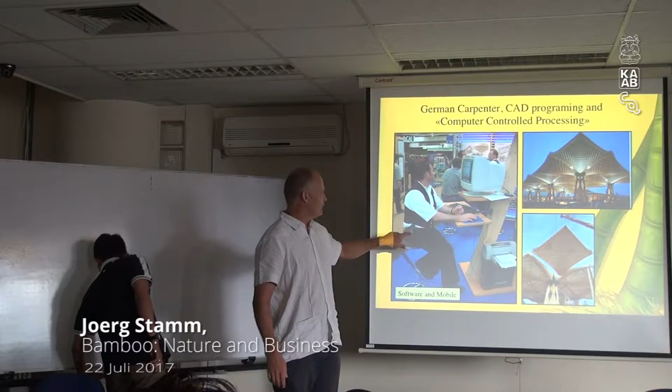So this is the typical job description of a German carpenter now: cell phone and computer. Before it was hard physical work, but there isn't really hard work anymore. Even nowadays you have women carpenters, because nowadays it's all about geometrical understanding, knowing the traditional joinery, and then you put everything into special software.

This is 20 by 20 meters, so imagine this like a 120 by 160 meter big roof in wood, laminated wood. ITB is very famous because you have one of the very first laminated wooden structures in world history. So I think it's very interesting for you to look into wood and also into laminated wood.

I brought you here one of the very first, some of you in Java also have this, from Indo bamboo. This is artificial wood. If you produce these kinds of laminated woods made from bamboo, you can also make beautiful big architecture with this type of material.

So as we have so much computers nowadays, and even automatic prefabrication, the computer chip, the hard disk, the CD, you take it out and put it in a big machine, and you put the trees in on one side, and on the other side all the little wood pieces come out with perfect cuts and drilling, perfectly prefabricated. Making one house is a one day job: one day designing, one day prefabrication, and maybe 2 or 3 days constructing. So there is no more work for carpenters like me, and I have to go to Indonesia to look for a job.

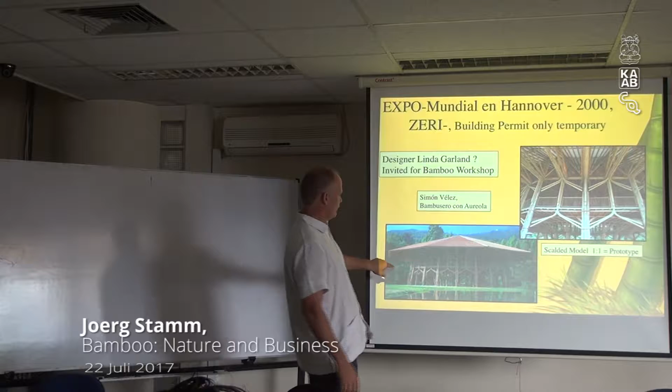For example, this building was tested, engineer tested in a prototype. They ran cables from here to here and from here to here, put a lot of load on it, and with the total station they checked all the deformations. Later they put the AutoCAD design into the computer to calculate with SAP 2000 and measure all the deformations, to get conclusions about the engineering capacity of bamboo.

We know bamboo has very big tensile strength, similar to steel, but the problem is in the joinery. So later we can talk a little bit about this - you were very honest, showing also the bad parts of your construction, because only if we put our fingers in the wounds can we really learn.

So making things, building, is a very dangerous job, because you are going into new terrain and you are making errors, or the technicians are making errors, and you are responsible - you as an architect are responsible. So you have to learn first from the masters and then do your own job, but also be able to check critically what you have done wrong.

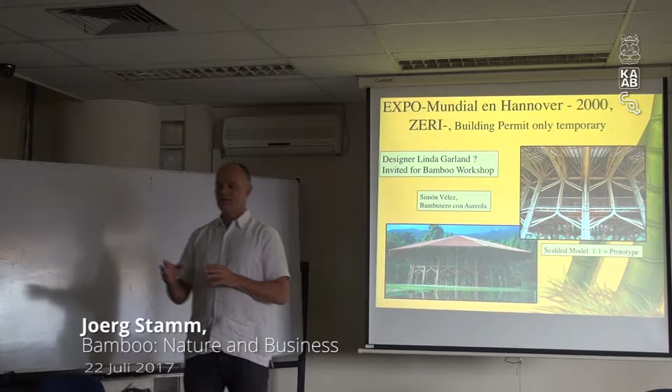But at the very end, you must bring in engineers to do the testing and verify if your SAP 2000 calculations are correct. The problem is not the bamboo, the problem is the joinery.

Linda Garland, I think, is also very important. I met Andri at Linda Garland's, but I think you gave the introduction already. So in Bali you now have these types of buildings. Actually, I was in 2005 giving a workshop at Linda Garland's place. I think you were there, and also John Hardy was there, and he got very fascinated about bamboo. He had done some traditional bamboo housing before, but now he started to do these crazy things.

And I think nowadays the world is looking to Indonesia and saying, wow, Indonesia is making wonderful bamboo constructions. And if I see your house, yeah, it's true, it's beautiful. You have a big potential. There is a big potential - only maybe 1% of the market so far.

But there is a potential for guys like Andri to go into the world, and for you too, but you have a fixed job. Still, there is potential for all of you if you become a little bit practiced and also visionary - there will be jobs. Hotels, social work is always good to start with, but you can't survive too long on social work, unless you become a UN consultant or something. That's good, so let's go on.

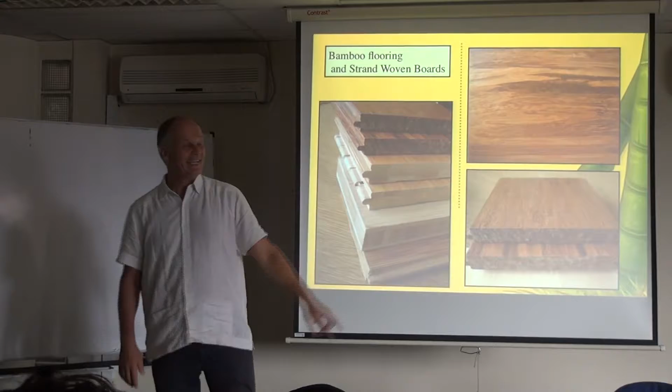So what we are doing is this type of bamboo flooring—we cut, split, and make bamboo flooring. Another type is what you have in hand: you crush the bamboo and glue it together so it really looks like wood. There's not much difference between this and the traditional look of wood. The specific density is more or less 1 ton per cubic meter, between 0.9 and 1.1, depending on the machinery. So the trick is to make splits, and then each kampong can have a collection center, where it is prefabricated into splits.

And then you send it to the factory, like Indo Bamboo or this other factory, Bambu Logi. So you can make blocks.

And these blocks, every carpenter, every furniture maker can use to make furniture. Before, Java was very famous for the teak industry, making thousands of teak chairs for the whole world. The logistics, the factory, the machinery is all there, but there is no more raw material. I think this, together with the 1,000 village program that Arif is promoting now, is the future of Java, and maybe Sumatra and Bali.

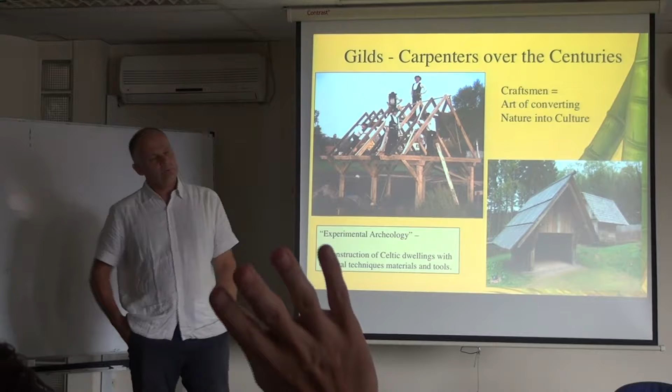So, a different topic. Yeah.

For the bamboo boards, I have a question. I already tried to work with bamboo boards made in Indonesia, but the problem was that it was just too expensive. I found a few factories, and the price for the material, the laminated board, was actually not much cheaper than teak wood. While in Vietnam or China, I get the boards cheaper than multiplex.

Not in China. Maybe in Vietnam you still get the same technology applied now, but the quality is so shitty, really as bad as multiplex. So the price relationship is very much tied to quality.

China made a big error for many years - they were harvesting 3-year-old bamboo. Now they have recognized that for panels you must have 5-year-old bamboo. The specific density of the bamboo must be around 0.6 to process it.

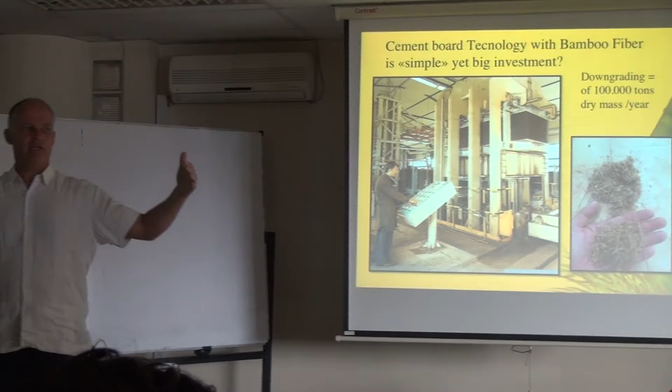And in China you have big industry - maybe 80% of an entire village is working for bamboo. Some are using bamboo laminate, some are using the leaves, some are using the fibers, some are using the sawdust, so 100% of the bamboo is going into production.

If you start a bamboo business in Indonesia, even though the bamboo is cheaper here and labor is cheaper than in China, you still have the problem that you have only one production line and one product. And 70% of the bamboo becomes sawdust - only 30% becomes final product, 70% becomes bamboo sawdust. And that's where you lose money. It's the most expensive sawdust in the world.

So I had a factory, I was doing bamboo laminates, and I produced at $2,000 per cubic meter. And China sells for $1,000 per cubic meter, and maybe Vietnam even for less. So laminate bamboo is very expensive - more expensive than teak.

You are right, and this is the problem. But the future - if you see here, this is sawdust - if you combine this machinery with the other one, go one back, then you are much better, because then you have a sequenced production line, you have different products, and it becomes organized and cheaper.

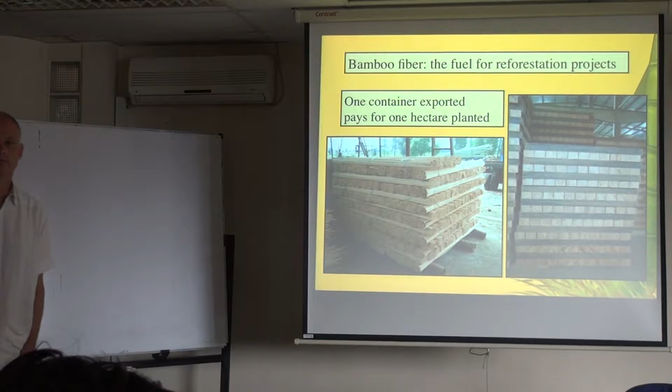But then in Indonesia, the Indonesian-produced bamboo boards are very different in terms of price. So why should I take bamboo then? Or how do I produce bamboo?

I mean, I've talked to the factories, I tried to understand their way of production, and the thing is, of course, the labor is cheaper here than in China, but it's also way less efficient than in China. So you have to work on efficiency, and you have to work on big scale production, and it will become similar to China here.

It's just a process of 10 years. You just started here - there are only 2 factories who make bamboo laminates here, and they are obviously much more expensive than big scale operations in China. China produces 30,000 square meters a month per factory, and they have hundreds of factories.

So on the big scale, the small factories in China went broke. They cannot compete with the big factories anymore. So there is price fighting worldwide, and I think your error is that you are targeting cheap. You should target the high-end market. You cannot compete plywood with beautiful, normal, ugly standard plywood at maybe $500 per cubic meter against high density, high value, beautiful, clean surfaces like produced by bamboo laminate. So you're using a very expensive wood for cheap applications. You have to think, if you do bamboo boards, you have to think in high-end products.

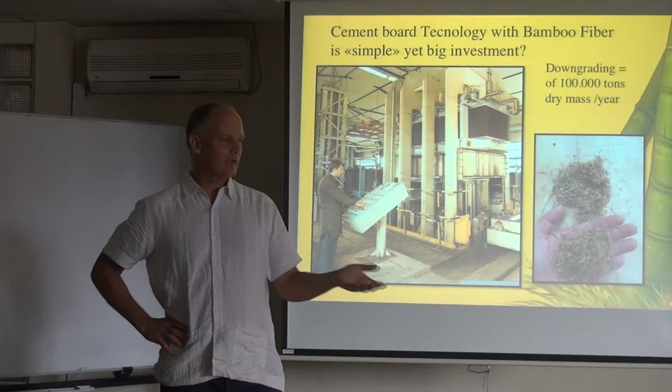The same like China. After Mao Zedong, China was a disaster. Then Deng Xiaoping organized China. He allowed a little bit of private industry to flourish, and nowadays China is planting 50,000 hectares of bamboo every year, because bamboo is recovering far faster than the hardwood. So the chicken and the egg is the same problem as getting bamboo industry into process.

But you are more architects, you are not into industry at this point. I just give you the vision. So there is one thing, can you go on?

In architecture, if you build traditional houses, you also have high added value, because the perfect bamboo pole gives very high added value in very short time. With 100 poles you can make a 100 square meter house very fast. But the 100 poles must be perfectly treated, perfectly straight. So maybe for 100 perfect poles you have 900 not-perfect poles. So 900 poles go into industry and 100 poles go into architecture. So I see that architecture is the flagship for bamboo development, but the real money is not in architecture, it's in the big scale operation of industrial uses.

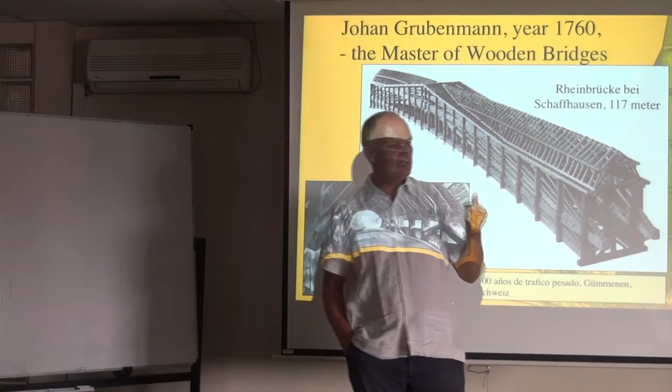So how can I make the structural capacity of bamboo visible? I look into my own history. This was a 117-meter bridge, built in 1760. This bridge was the biggest wood bridge ever built, before engineering was invented.

Engineering came up with Gustave Eiffel when he built the Eiffel Tower. He used French carpenters to build the shape, to give him an idea about how to structure the Eiffel Tower. So before Gustave Eiffel, there were carpenters who were able to build 117-meter bridges over the Rhine. And the guy who did this, Johan Grubenmann, he did not know how to read, he did not know how to write, but he knew mathematics and he knew he had a good crew of tukangs.

And the span, like here, two big carts of horses, carreta, can go through here, very heavy, 50 tons each. So the old school is very important. Go.

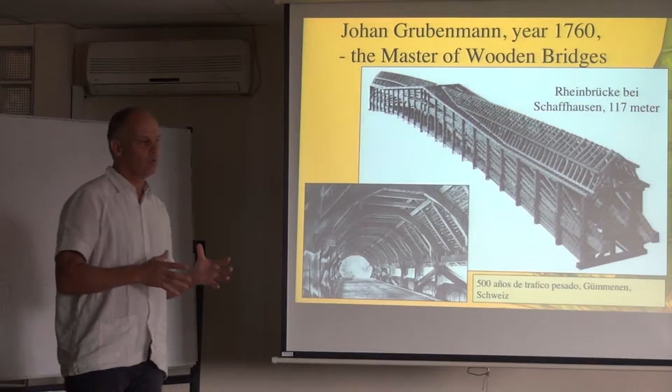So what I do is transfer old wooden bridges into bamboo bridges. My specialty is not inventing bamboo or designing with bamboo. My specialty is the joinery. All these little joints are very well thought through, because in Germany the carpenter is not a designer. The carpenter is only responsible for the joinery, for the traditional execution of the joinery. That's our strength. The engineer designs, the architect designs, the engineer does the calculation, and they give us the responsibility for the perfect execution. This is something that has to be developed in Indonesia.

You have to work together with the technical schools. So university is one thing, engineering is another thing, and you have to have the tukangs trained. Otherwise you will have the same problems that Andrea was experiencing, like this hook joint. It's bullshit.

You can use it for furniture, but you cannot use it for structures. But you have to have the experience. So now he has the experience, and later he will do better. So go on, we did this training.

We did a 40-meter bridge. This was the bridge that was the inspiration for you. This is the 40-meter bridge in the University of Pereira.

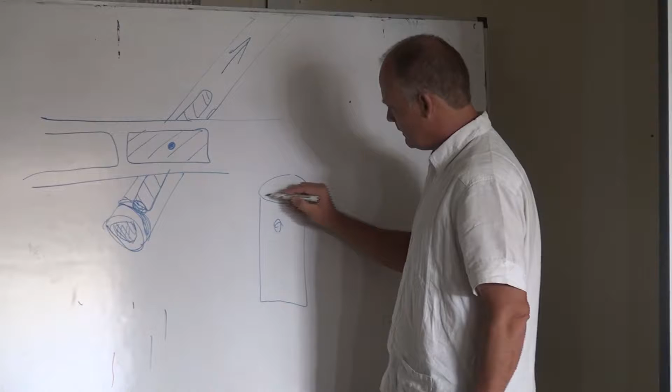If you have a bamboo, you put a screw here, and you do not have a node - let's say the node is here, and the force is going this way - the problem is that the bolt is acting on this part. So it's probably taking this out. So if there is cement in here, it is only working on this piece of wood.

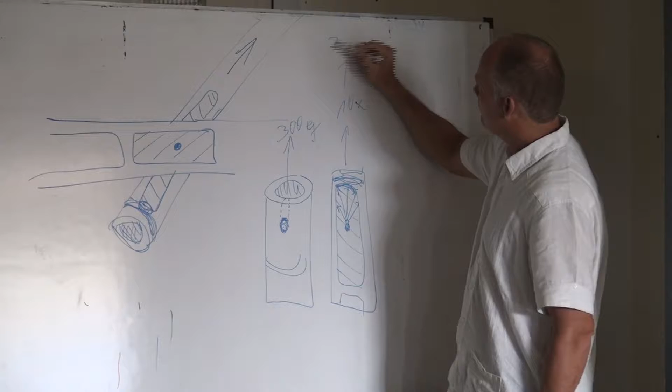But if you have this situation, and you have cement in here, then the cement is covering all this area here, including the node here, and it's 10 times the capacity. So here we have more or less 300 kilos, and here we have 3,000 kilos of tensile capacity.

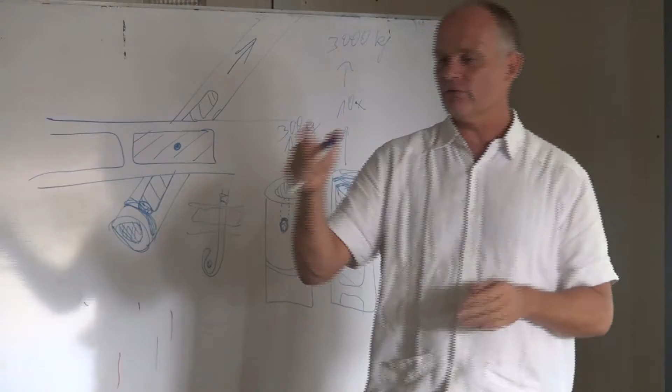This is something that has to be developed. It's part of the engineering process you have to do. And if you put a hook like you were doing here - here is your bamboo, and here is the other bamboo, you have a hook - your hook is actually doing this. The hook doesn't have the resistance, so this is a furniture joint. They do it a lot in Colombia, but it's wrong.

A lot of things done in Colombia are good for one-story buildings. They are beautiful, but structurally not sound. So I think Andre is a much better consultant because he studied structures. He knows exactly what I'm talking about, and you have to go much more in detail into these little joinery things. It comes down to the tukang.

I'm a tukang, I'm a carpenter. My responsibility in a bridge is to make this thing work. The engineer tells me this element has to resist 10 tons. So I know how to distribute the 10 tons in the different nodes.

Maybe I have to put a second bamboo here. I can put a second one here, and a second bamboo here. So I have already something here, and then I can have another bamboo going in the cross direction, so I do another joint here. There are many possibilities to upgrade joinery to the resistance I need.

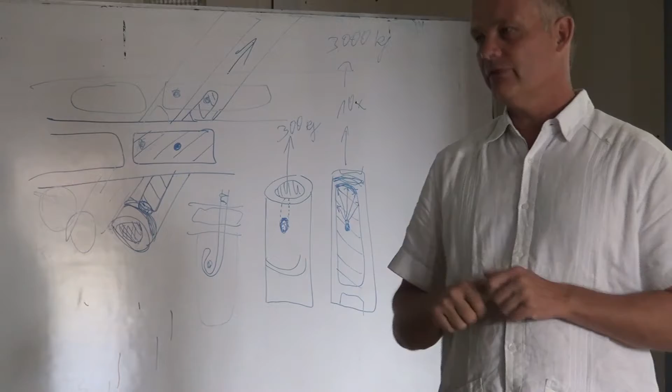The node must be here, for example. And you can still have going further down, and also on the top. So I also have 10 or 20 centimeters possibility of putting it a little bit longer. But always after 30, 40, 50 centimeters, there's always a node. So your system has to be thought out already to have this kind of tolerance. You always have to have a node, always a node after the...

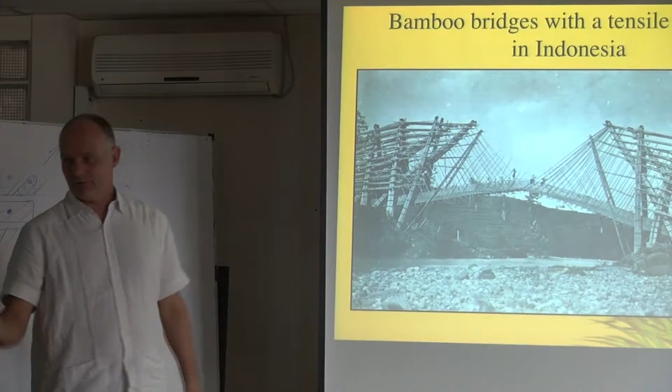I think in your presentation we could clearly see some bolts were just cutting through, because of this little problem. Okay, next. I was very happy to see the Indonesian achievement, like 1910. This photo was taken. Java had a very outstanding bamboo construction history. This is great. This is a tensile concept.

This is a cable-stayed bridge. It's top engineering in the 21st century. How can we get this back into tensile structures? It doesn't have to be exactly the same, but the thinking that was done in this bridge is extraordinary, and it's your cultural heritage. So pick up at that point. Go.

This is another bridge. It was inspired by a footbridge in Germany, Professor Zengler, who was the most famous German wooden bridge builder. He made this triangular concept, to put the trusses not squared, but together in the middle. So he created a triangular cross-section of the bridge. Very clever. This guy made recently an 80-meter bridge in wood. And I admire this guy, and I learned from him to think out of the box.

So here we have tensile elements. I use the petung for the tensile elements and the hitam for the cross bracing, for the cross section. So the outside is compression, the inside is tension. And here you can see the joinery. The petung has very short nodes on the bottom, so you can always play with the petung to get the right distance. And on the top, you just leave it a little bit longer.

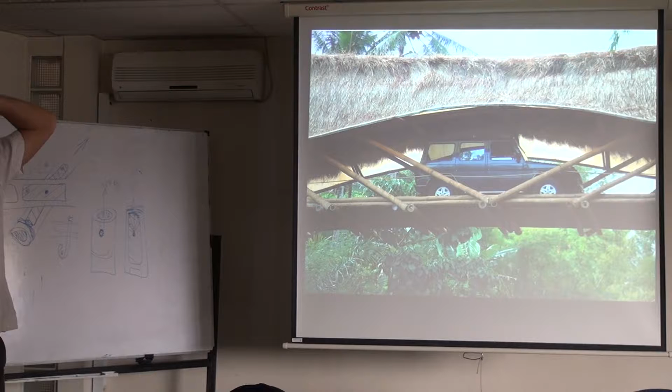That's easily 1,000 divided by... that's easily 20 tons of load on the bridge. This is the problem with the bridges. It's not possible to make a little sign, maximum 12 people. In the moment when it starts raining, nobody sees the sign. They just all walk on the bridge and they go for a bath.

This is a very interesting flooring concept. You were saying that bamboo laminate is very expensive. I had the same problem. Part of it is the glue. The glue is a very high quality glue, so it's very expensive. So I use just the bamboo split vertically and put a pin through it. I call it pin boo. And this flooring is strong enough to distribute the load of the wheels of the car. No glue.

Okay, so this is just design. Structurally there is not much going on here. The bridge basically is the arch, a little bit of distribution, and maybe a little bit of counterweight because there is no cable. If there would be a cable, then you can say it's a cable-stayed bridge. But here we have just a little bit of cement, which is the counterweight to maintain this in the middle.

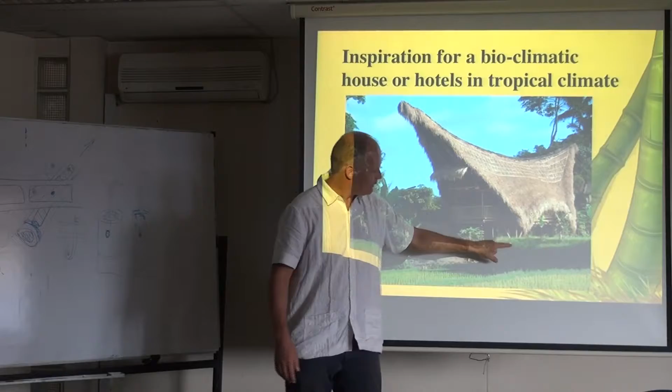This was the first bridge. Later they did a second one. It was not the original one anymore. And then John Hardy donated a house, and this house is standing on 4 points. The entire house is a little bit like Toraja, but the entire house has the idea of leaving the air out. And it's like a bridge, it's standing only on 4 points.

So this is for the architects, just to inspire you that bridge is not everything, but you can also jump over from one theme to another and use structural concepts. Go on. Like you see here, I use the stair. The stair is coming all the way down to the foundation because the stair... go back.

The stair starts somewhere here and goes to this part of the foundation. So the very big cantilever of this roof is tensioned by the stair. It's a little bit like a musical instrument. Now there is a certain tension, inside tension on the bamboo, also with the curve and everything.

Everybody loved this, but the Balinese, they hate it. Balinese need squared houses. Maybe in Toraja you can make such a house, but you cannot make such a house for Balinese—it is against their world perception. It's just not possible. I don't know if they still use it or if it's a museum now, but they didn't like the house.

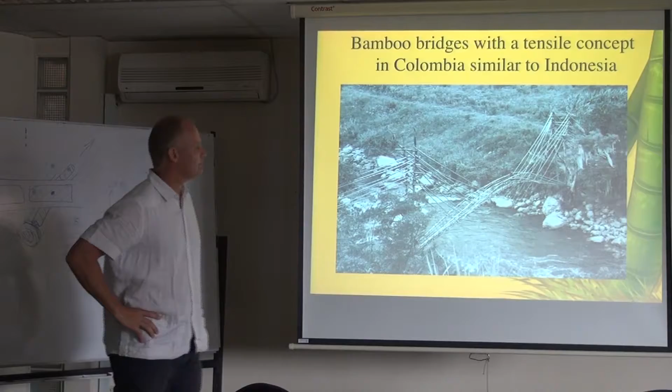So I took that bridge and converted this into a modern design. This bridge has tensile elements and it has the bow—so here is the bow, and here are the tensile elements. This is a 24-meter bamboo, but it has 8 meters here, 8 meters here, then 4, 8, 8, 4. So I'm overlapping the bamboo to make tensile elements, and the joinery is done like this, with a rebar inside. So I use this concept.

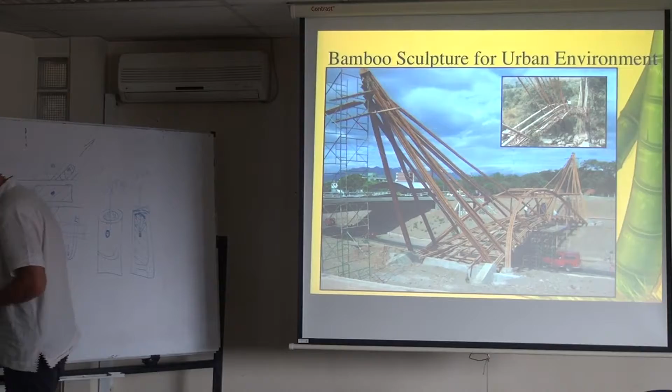Here is the rebar and the cement. This is the way I can even put a second node. If I need a bigger rebar, I can put a second node here and a second node here, and also— you understand the concept, no?

And then the other bamboo is basically going from here to here, and has the same situation here. Additionally, you can have all kinds of screws—just giving you some ideas of how to build this. You need a counterweight, right, on this—yeah, here I have a big metal plate, and you can see it in the next photo.

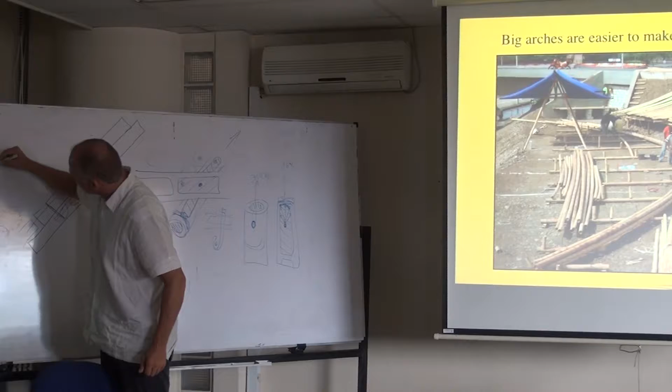So I don't like the wrap technique that is used in Green School. In Green School they have a bamboo like this, and they cut here to bend it. But what's remaining is basically only this part of the bamboo is structural. This is remaining from the bamboo, so this is not a structural concept—this is working with splits, bending splits. The structural integrity of a bamboo tube is cut here, cut here, cut here, so it becomes a combination of short sticks. It is not structurally sound.

So what you have to do is select the curved bamboo. When you buy it from the farmers in the field, the bamboo is like this, so you have to pay the farmer extra money to bring the very crooked ones for shipment. Normally they cut the crooked ones into short pieces because there are many crooked bamboos, but they cut them short. You have to pay extra money to get the very curved ones, and then you can make very good bridges. They are there, but the farmers cut them into pieces.

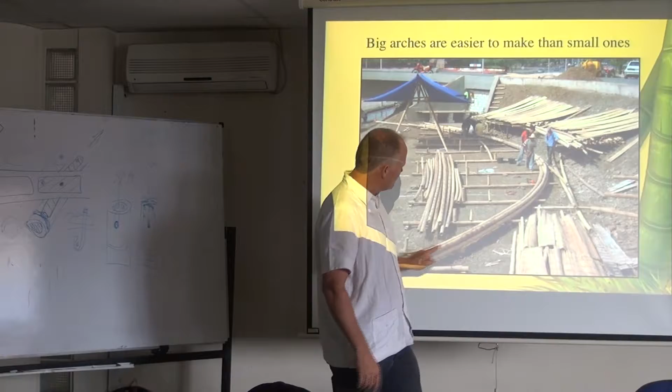So I select—look here, they're all very long, a little bit curved because they are for the arch that goes here. You see, there is a system, a coordinate system. I have line X here, line Y here, and each steel pin is from the coordinate system in my AutoCAD plan—I transfer it to the soil. So I can make this arch, I can make this arch, I can make this arch. It's exact, with 1 centimeter tolerance—that's the way to work.

And it's a system—it's what carpenters do. Carpenters put something on the ground, they take the plan, they put it on the ground, and they work on the ground first, and later it is erected again. This is the trick to do big structures—at least it's my way.

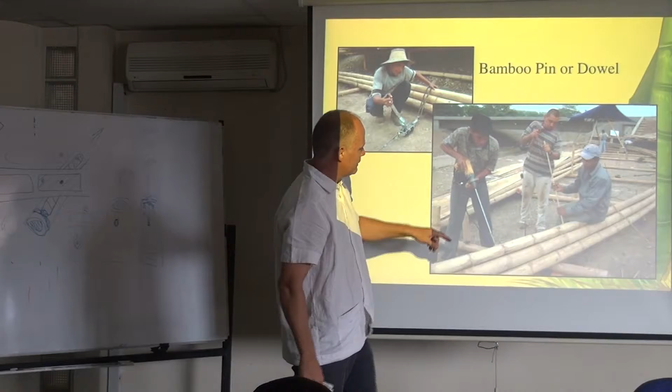Sometimes we can press a little bit, and then I put bamboo pins every 50 centimeters to combine them. Let's say you have 3 bamboos, and then I put bamboo pins here, here, here, and here. Sometimes I also use steel rods, for example here's a steel rod, when the bamboo is not voluntarily coming down, if it's a little bit up and doesn't really want to come down.

What's the size of the bamboo pins? 12 milli. I make them myself, dowels. I have a dowel machine, and all the bamboo that is not usable for long elements, I cut in 1 meter 20 and make dowels.

So you see the whole bridge is pre-assembled on the ground. That is very typical German, French, or Swedish way of building houses. We do everything on the ground, and then with scaffolding or maybe a little car crane, we just bring it up. This you can only do with bamboo, you cannot do this with wood structures. Wood is too heavy, but bamboo is light, it's a lightweight construction. So the concept is build on the ground and then use a crane or labor force like you did with your 100 Filipinos, just put it there.

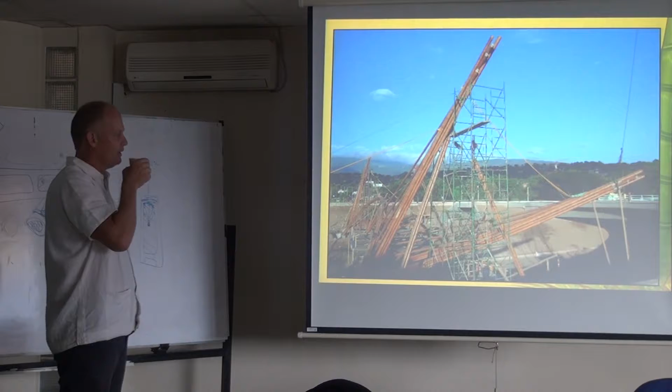You see here, I limited the width. The width of the road is only 3 meters, because if I would make 6 meters, like now in Medan, we are doing a 6 meter wide road, but then I have the danger of having 1,000 people on the bridge. If I limit the road, I have only 500 people. But the architect in Medan is a little bit stubborn, I told him to, but he wants to have a disaster, so I don't know.

I'm curious, how do you erect the curve when the road is still normally used by cars? It's already selected. When the bamboo comes in, I have a truck with 200 bamboo, so 20 are very curved, 20 are a little bit curved, and 30 are straight.

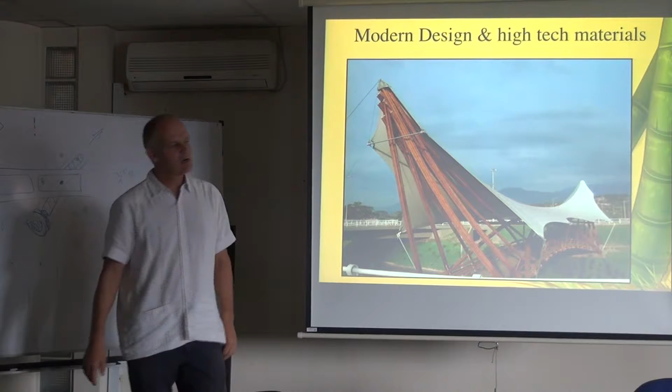Do you put them all on the road, do you stop the road operationally? You see here the scaffolding, and the road is free. You see there is a bridge, like we call it a false bridge, and there is scaffolding under the bridge, but the road actually is going through here.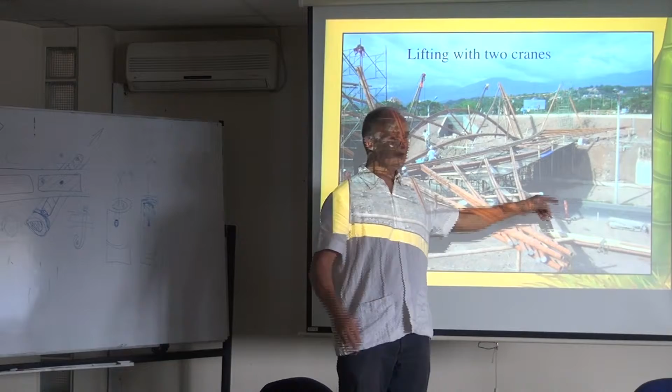But in Colombia we have a little bit of a problem which you don't have here in Indonesia. Colombians like to drink whiskey, and especially in this city we had an accident because some drunken drivers jammed into the scaffolding and damaged it. The car, I don't care, but even though he took out the whole line of scaffolding, it was still strong. So the scaffolding was not on the street, but he kind of hit it anyway.

I wonder about the durability of this bamboo, because it is not really covered. Well, it's now 10 years, so you see some cracks here. The cracks are basically from non-mature bamboo, especially petung. If petung is only 2 or 3 years old, you have lots of cracks, if it's 5 or 6 years, you have little cracking, same with guadua. But the problem is the delivery is always late, the bamboo comes always green, and you don't really have 100% selection, so sometimes a little bit of unmature bamboo goes into the structure.

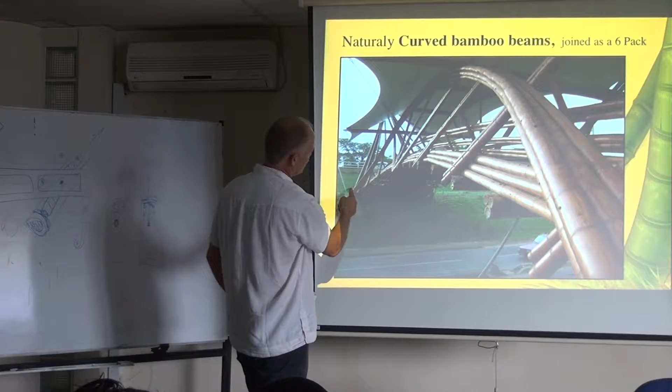But you have big packages here. We have a 3 meter span from here to here with the roof. So it's more or less 3 meters here, and the bridge here is wider, but you can also see that the roof is wider, so we have sun coming in, which is actually causing the cracking.

But then I have a very good coating, like Livos deck oil. It's very good coating, and we also used it in Koh Kood in Thailand. Is it available here in Indonesia? There's a distributor in Bangkok who sends also to Jakarta. It's called Livos Alice deck oil, it's very good. But I think you also have local products here that are good enough. Anyway, it's just a question of coating.

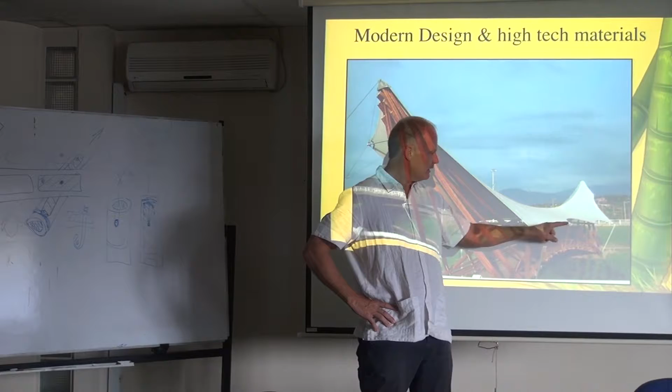So here you see the sun is now coming from the side, and I put these 2 additional points. Normally it would go straight, but then I would not have enough shadow, so I introduced 2 extra points. This roof shape is actually inspired by Indonesia, because before coming to Indonesia, all my bridges were straight and square. I learned in Bali, like also with the Batak houses and the Minang houses, they have this shape so the hot air inside is always going out. I love this inspiration from this style of roof.

Here in Vero Beach, Florida, we did this to let the air out, so this is a little bit more like a Javanese Joglo style. But it was the first building in the United States with full certificates, like engineers signing off for a bamboo building in the United States. That was a big achievement in 2004.

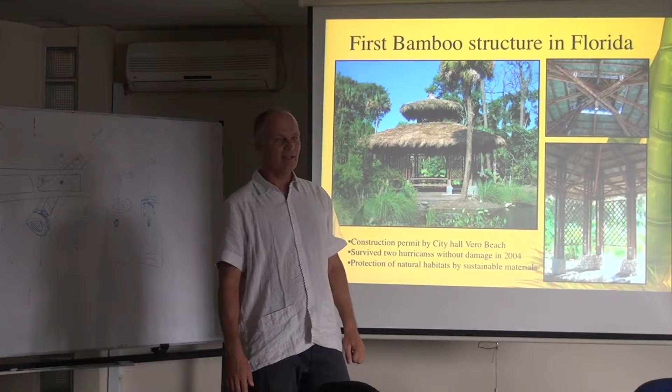You mean Indian, American Indian or Indian? American Indians.

This is another development. Actually, bamboo is very straight, sometimes a little bit crooked, but not really curved. So at John Hardy, we played around, because he's a jewelry designer, so he wants to make everything curved. It's not possible - or is it not possible, or do I have a limitation in my brain? One day I was seeing a whole pile of bamboo, because we always work with the bottom part, we never work with the top part. But the providers were also sending the top part, the tip, or the ujung, and it was always piled up there. So how can I use this?

Then I came across a book about Japanese architecture and Japanese gardening, and they have something called tamabuchi, which is like a broom, like a lidi. So we cut all the bamboo into 1 centimeter, pencil-sized sticks, and join them together with tali.

And then you can actually bend it. You can see here, it's all bent, like a big rope. Or here.

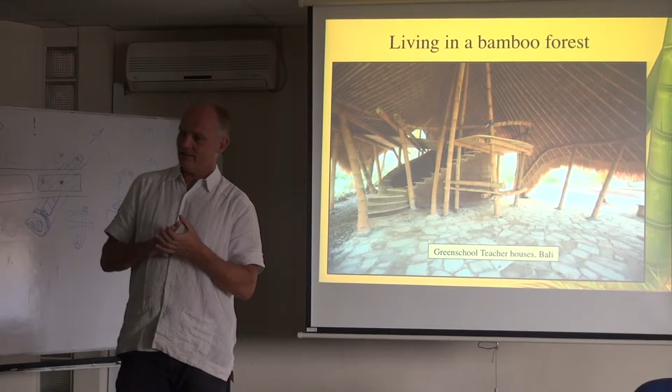So using all this bamboo lidi, we discovered a completely new system of construction. Actually, it's not very good in flexion, it's only good in tension. But if you put some bamboo split inside the lidi, then it becomes strong, or you can put a smaller bamboo inside and bend it, and it's still strong enough.

Can you please tell us how to bind those small lidi bamboo? Go back to the 2 or 3 photos back. Here, yes. So I take a Spanish windlass. I have maybe 100 splits, like very 1 centimeter by 1 centimeter. Then I take a rope and this.

Rattan or what? No, this is rope, they use bamboo tali. You can cut and make bamboo tali out of it, that's why it's called bamboo tali - you can make a rope out of bamboo. So this rope you can buy. Then first I press the lidi really strong with the rope, I twist it, I press it. Then I put the tali around with a little bit of lem, a little bit of glue.

You press it around and then you release it, like a Spanish windlass, and then you have the system.

Do you construct it on site or on the ground, vertically or on the ground? We prefabricate in the factory and then 20 people walk it to the site. How do you form it? You can form it in place. First you make one straight lidi and then you just twist it.

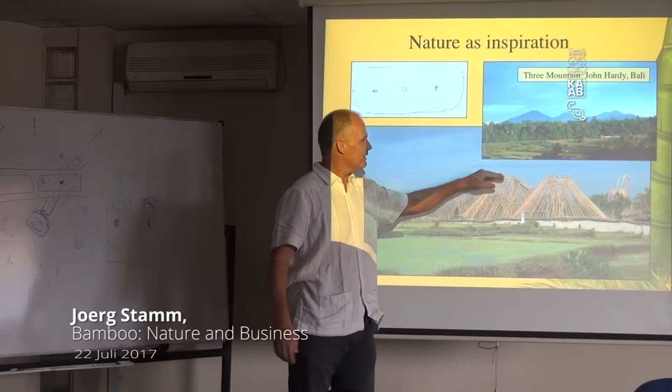So inside, go on, one more - inside you have this tower. So I have a ring formation on top, a strong ring, laminated bamboo ring. And on the bottom I have another ring. And I have these V-shape elements.

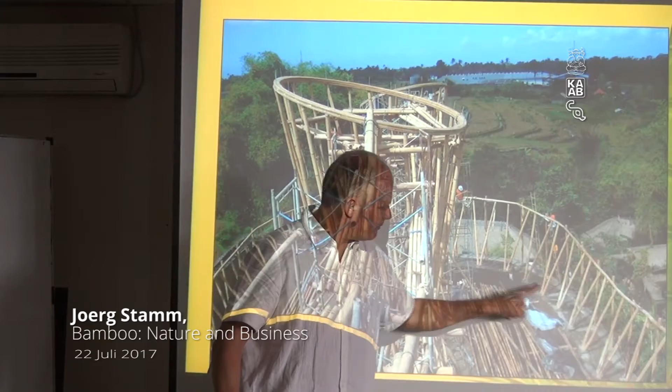Then we put the rafter from the top ring to the bottom ring. And I think now you can explain, because this is the first building that has been recycled.

After 7 years they needed a new roof, but the world economy was not so good, so they decided to sell the whole building. And the whole building was transferred to Turtle Island. And you were the master of reconstruction.

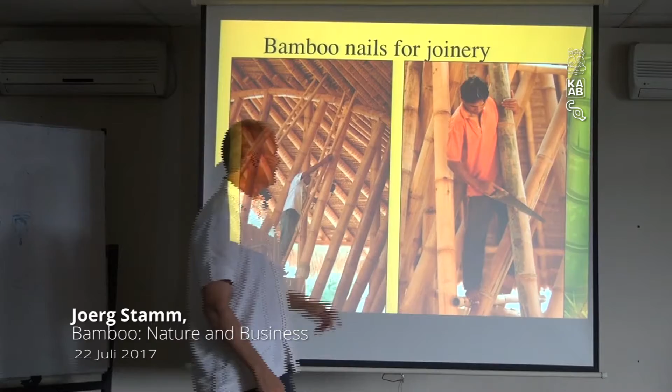But if you go like this, from here to here and from here to here, the cross will prevent you from taking this apart. So the whole tower was calculated for 40 tons of weight, because if the alang-alang gets wet, it will put 40 tons on each tower. Nevertheless, we never had a problem with this system. It's very strong, very interesting, because nobody sees it. If you have steel, everybody says 'engineered structure, very clever,' yeah?

Sometimes if I know where the force is acting and I know there's a lot of force, I still use steel rods in the same system, and cut here, because it cannot come out. But if the force is only around 300 kilos, I can use bamboo, I don't need steel. But if the force is like 2000 kilos, then I have to use steel.

So this is a little bit of the effect, you have compression, tension, tension, and here you have compression. On the top, I have a skylight, but the roof of the skylight, the glass, is like 30 centimeters higher than the roof.

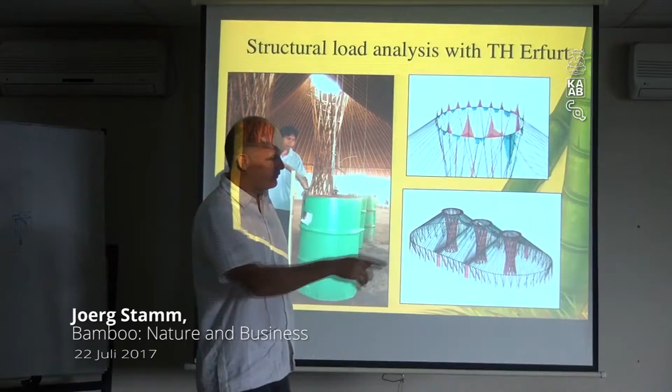So, one more photo. You can see the air is coming in and going out, it's very nice natural air conditioning. This is one of the most amazing discoveries, Green School doesn't need aircon, it's natural aircon.

So tell me the story about Professor Neuhoff, did he come to do the engineering, or you don't know too much about it? One of the professors working together with Andri in Germany came with a student group, wanting to see a bamboo building. We were just doing this, and we needed engineering, because the authorities always want a sign-off from an engineer. But no Indonesian engineer was willing to sign off.

Understandable, because you're responsible, you go to jail. Although you have a very beautiful jail here, I passed by Lapas Sukamiskin, a very big one. I think it's better to stay out.

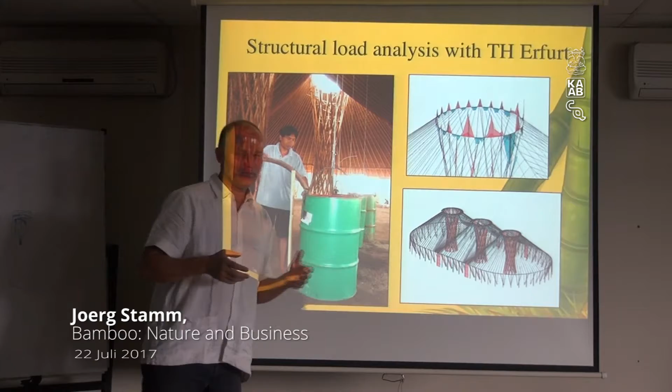Anyway, Professor Neuhoff and the German students took some measurements. This barrel was actually hanging on the roof, on the rafters, with 200 kilos of water in it. In total we had 5 barrels, 1 ton of water, and the roof came down 16 or 17 centimeters.

And at the same time, when the roof comes down, it goes a little bit like this. Yes, so basically the span here expanded like 3 or 4 centimeters. So these measurements were taken, and then they brought this to Germany.

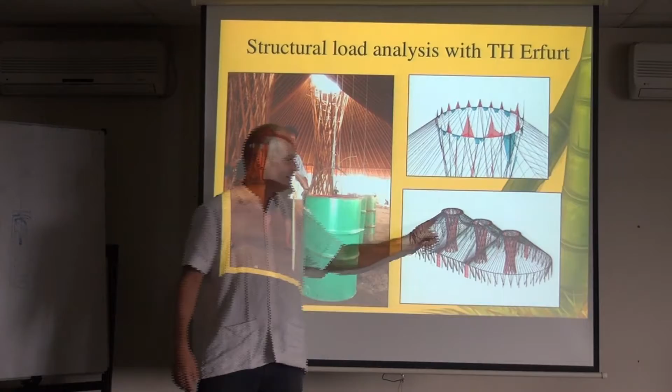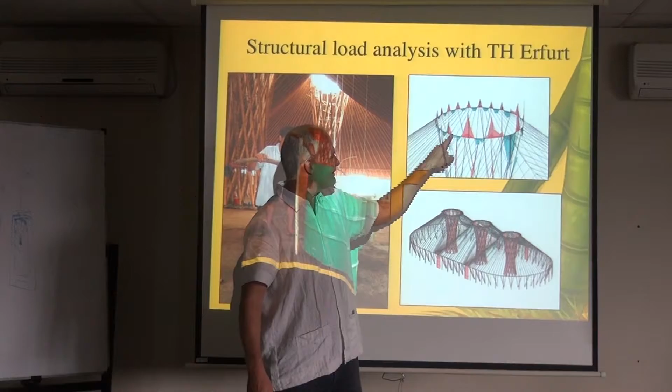When they came to Germany, they noticed their software didn't have enough capacity to calculate all those elements, because there were like 500 elements in this - 500 elements means probably 1,000 joints. So they didn't really have the software to calculate it. It took about a year until they got financed for new software. They bought the most modern software, put this whole building in it, and calculated the stresses at each point.

Wonderful graphic. But for me, the most important thing was Professor Neuhoff called me and said, 'Jörg, I must congratulate you, your gut feeling was just 3% different from the ideal point of building this structure.' For me it was a very honorable comment, because from 20 years of experience working with bamboo and wood, I could mostly predict not only the bamboo but also the strength of the joinery. Because as I told you, we have to work together - architects, the concept, the engineering, the execution have to be perfectly executed.

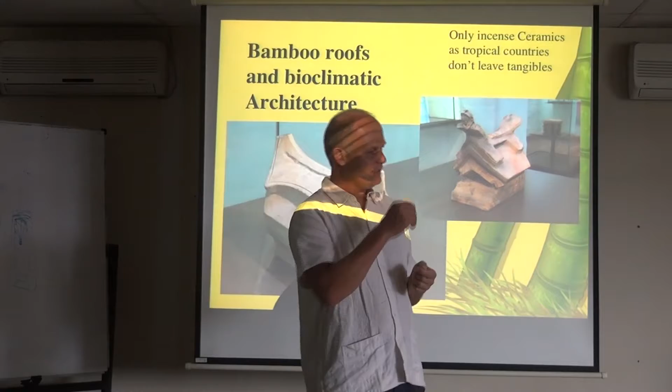So bioclimatic architecture has been done centuries ago. These are ceramic houses, for incense - like smoke, like Menyan, sandalwood. So the ancient Ecuadorian people made these little houses to smoke to the gods and to pray. But look at the shape of the roof - typical tropical architecture.

Nowadays in the tropics everything is squared with a zinc roof on top - this is the architecture of today. And before, this was the architecture. I think this is very similar to Batak or Karo, and also very similar to Toraja. So maybe there is some connection between Indonesia and Ecuador.

So I was building a house there with the same system, prefabricating big A-frames, and we used the bamboo as scaffolding. Later, when you finish the house, you take the horizontal beams out. But the house is standing on four beton pillars.

So my proposal was this should be the architecture for the tourism industry, because this is ethnic identification with cultures that have been in Ecuador 3,000 years ago. They have bioclimatic aspects, cultural aspects, natural materials. For me as a tourist, I would go here - I would not go to a standard square box, 7-story tourist hotel. So my proposal after the earthquake, we just built this. We trained the personnel, we trained the local carpenters, and we also gave them a new idea about their own culture, because it was completely forgotten - nobody knows.

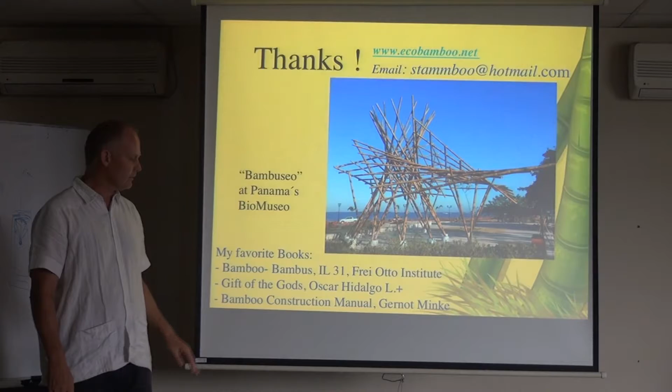Okay, so some books - the most important books, in English at least: 'Bamboo, Gift of the Gods' from Oscar Hidalgo, which looks at thousands of constructions all over the world, and the Bamboo Construction Manual from Gernot Minke. My email, and that's it for now.

So now we can have a little bit of discussion, or rest, maybe some cigarette or coffee.

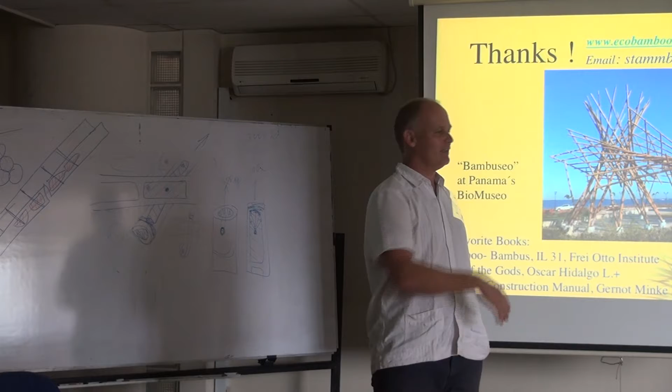They were discussing the price so much, and at the end of the day the provider just cheated and sent a lot of bamboo that was not suitable. So price discussion without actual knowledge about what you are doing is worthless.

The same with the tukangs. If you get a tukang, they all know everything, they're all the best. The Colombian carpenters, the same with the Indonesian carpenters, with the Balinese, they're all the best.

But when it comes to cement mortar injection, they have no idea, they've never done that, and they don't understand where the bukus have to stand. Like in your construction, you have so many errors because they did not look to the bukus. Or they just tell you, we can't, because they have different distances. Then you must change the concept, you must adapt the concept to the situation of your bamboo.

So I think the training is more about linking the engineers with the tukangs. It's not that I have to show them, they are very good. But they need better payment, they need recognition, and they need a little bit of working-together capacity, because for tukangs, sometimes 1 centimeter or 1 millimeter, no problem, no difference. But in engineering, that can make a difference.

Because if you go for the perfect curve, then the structure, the beam, is very strong. But if you go a little bit, like 2 or 3 centimeters off, like in your situation there, the bamboo was just not perfectly curved, then you will have a structural failure right at the point where it goes 2 or 3 centimeters down.

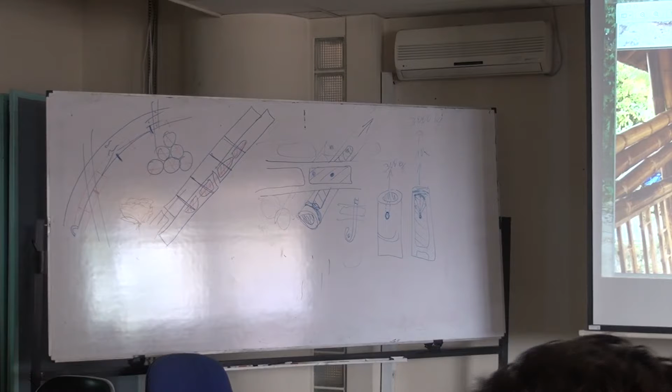Probably we should also go into some mistakes. Again, in Colombia - show me the collapsed second bridge. Yeah, the collapsed bridge - this bridge was supposed to be done by Simon Velez.

So Simon Velez is a very experienced and very high quality architect. He has a good team. But the problem is he was asking for, I think, $300,000, something like that, for the bridge, because he is a private entrepreneur and he has to pay the people. But then a local institution like the Technical Institute of Medellin said, we can do it. We are bamboo technicians, we are the specialists, and we will hire an engineer, and the engineer will do the bamboo engineering of the bridge, and we will do the craftsmanship - we will do it with our institute. So they were getting 16-year-old, 18-year-old young guys that have no experience in life.

And the supervisor was a big, fat, eternal employee - like, he was a carpenter, but he'd been 50 years already in the institution, and you know how institutional mentality is. And they started to build the bridge, and they didn't pay a penny. They were all interns - there was not one experienced carpenter. All interns, because they wanted to show that the institution can do good. And this is the result.

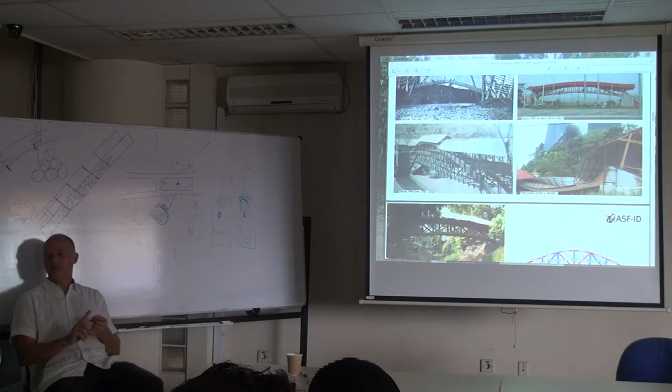And what about regulations and permits in Colombian cities like Medellin? Yeah, if you have a computer program that says it's okay, then you can build, because then the insurance paid for this - every step was formally done well. But they just didn't count on the craftsmanship, they didn't count on the quality bamboo. They did everything wrong, but formally, they fulfilled all the requirements.

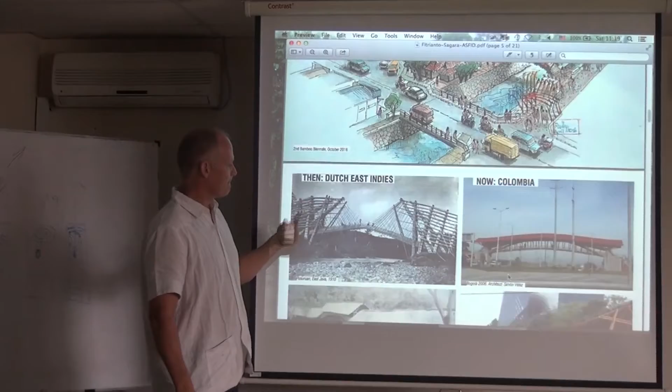So I can only warn you - you really need to start slowly and get better and better. Like what you had here with yours - go on, 2 or 3. Before, after? No, I don't remember. But no, in the building process - here, stop. This is not working.

So let's say you even do the welding - maybe you do welding of this. But what will happen is that this hook, first it will get like this, second this will go like this. So you create stress here, and this creates a crack. But if you put cement in here, at least this thing will not go down - it will stay straight because it's on cement. So this is the first error.

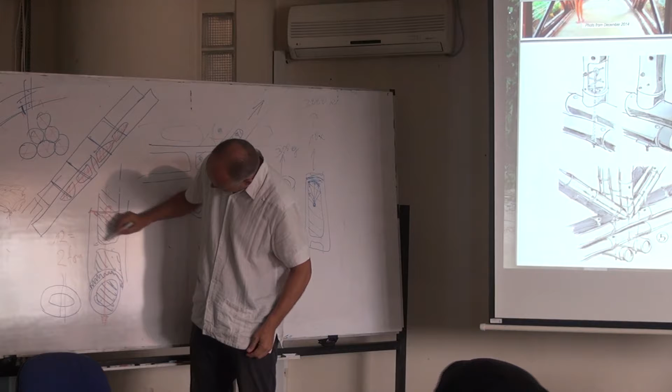And you see here you have a force, and here you have a force. So we did the testing, and after 2 or 3 tons going in this direction, the bamboo will crack, because the force here and the force here, they are actually separating. But 2 or 3 tons is already 10 times more than only having a screw. 10 times more is a lot.

So sooner or later you must do some joinery testing, and it's all described in the book of The Gift of the Gods. Jenny Garzón did the testing.

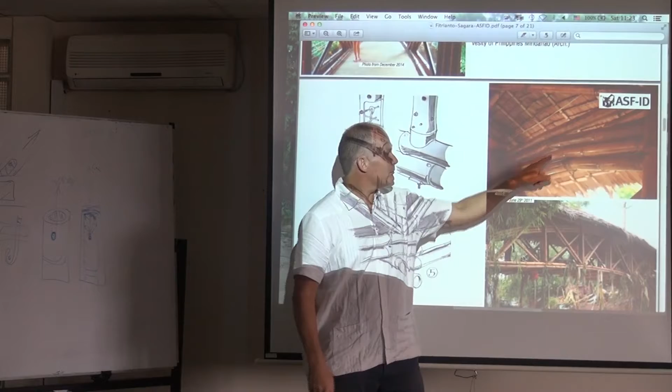So this node is very important, but in some of your photos, go up. No, other way around. Look here, for example, here you have this type of joint, but it's very far away from it, it's just in the middle. That's why it's going up, and then it's pressing on this, and it's creating this. So it's the position of the joint that is the problem.

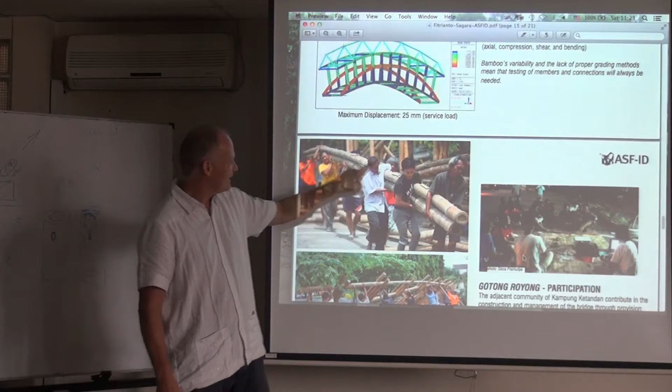So all the engineering is very nice. Stop. Do you see this straight line? It's curved here, then it's almost straight, and then it's going over. You remember the final bridge? The same straight line here is finally in your arch also.

So selecting the right bamboo, the right curve, is only possible if you have a lot of bamboo for selection. So when you start a bridge project, you have to bring 2 times more bamboo than necessary. This allows you to look for the nice curves. But this has to be reflected also in the budget.

But you're doing community budget, so you have a very strict cost. You don't even apply a fee to yourself. That's why you come up with these very, very cheap prices. In reality, the bridge we are building now in Medan is a $100,000 bridge. That's about 1 billion rupiah. So the price actually is very comparative to a steel bridge, not much cheaper.

30% of the cost goes into the concrete foundation, 30% is bamboo, and 30% is the roofing. If you have a bamboo bridge without a roof, you won't have a bridge after 2 or 3 years. So the roof is part of the bamboo cost, and you can say the concrete is also part of the bamboo cost. So basically $30,000 including bamboo, labor, and paying me, and then you still have to buy some roof, which is maybe Eternit or very expensive metal sheets, beautiful. So it really becomes a nice project.

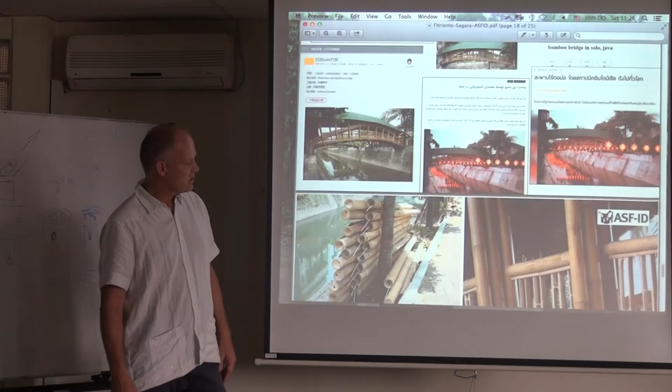Oh, here, you have all these hooks. Are the hooks welded or only hooked? Hooked, only hook. Problem. And then it's not only the hook that's breaking, it's also this. And even if you weld it, this is 3/8.

3/8 milli, like 10 milli? 12, so 2 tons more or less. This can take 2 tons, and then it will pop off. So you have to bring the 2 tons to this, but this joint only holds 200 kilos. So the proportion between the 12 milli and the capacity of the bamboo is not the right proportion. But if you put cement in here, it will already be better. And if you weld the hook, it will already be 2 tons.

And then, like this one, you can see this hook, like here. The node is here, so this will only be like 80 kilos or something. It will just do this. No node means go. Next.

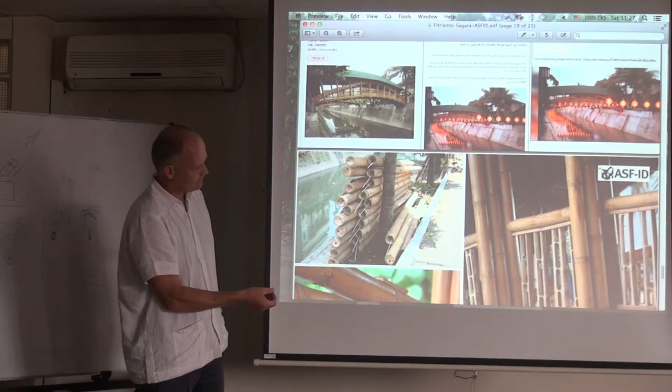But I don't want to be like this joint in compression. It's not good. In compression, you do fiber against fiber, not like this.

This problem here is caused because you have no cement in here. So these screws, like this is taken, like this is going down, but there is no connection between this and this. If you would have a buku here and cement in here, totally different picture. So these small details is what the Tukans must learn, and you as an architect, next time think about these details. Like here, no buku, yeah?

And then sometimes it also happens that you put the cement in when the bamboo is still green, so you have fresh bamboo. Bamboo in the process of drying shrinks 10%. So if you have fresh bamboo, you put cement in, and then the bamboo starts drying and shrinking 10%. So you have to put the cement in when the bamboo is already at like 15 to 20% humidity. Otherwise, 70%.

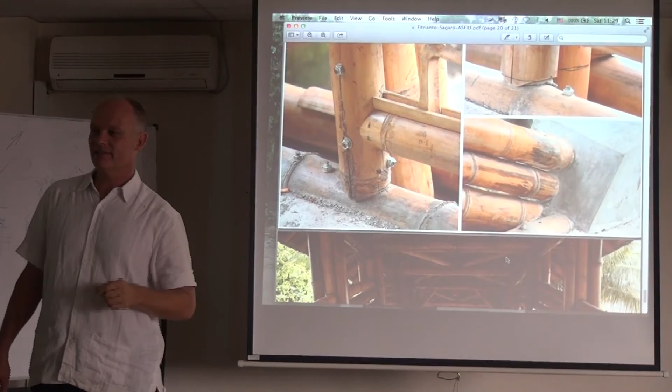One more, like here. I think there is cement inside or not? There is, yeah. And maybe there's also cement here, but maybe it was just too much moisture. Maybe it was not dry when you were building, when you put the cement inside. It's not actually because of the force. Maybe it is because, if it would be of the force, it would be open here, but it's still closed, there's no distance. So the problem is not coming from the screw, the problem is coming from the shrinking.

Like here, is probably the same photo from before, yeah? Because you have no buku and also no cement in here.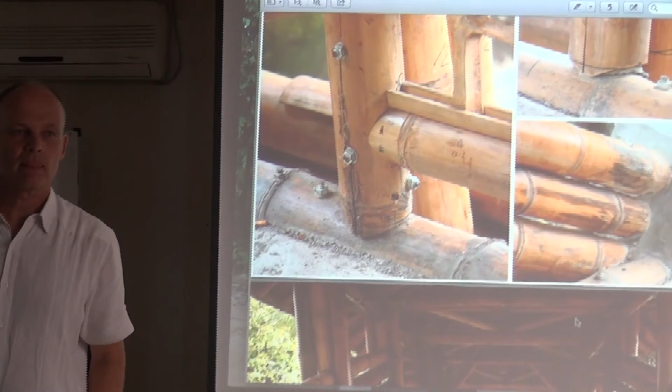George, in your experience, what kind of cement did you insert? Well, it was like normal Portland, and then you put 1 cement and 2 sand. But sand and Portland only? Yeah, you need... but for shrinkage, sometimes I put a little bit of Sika.

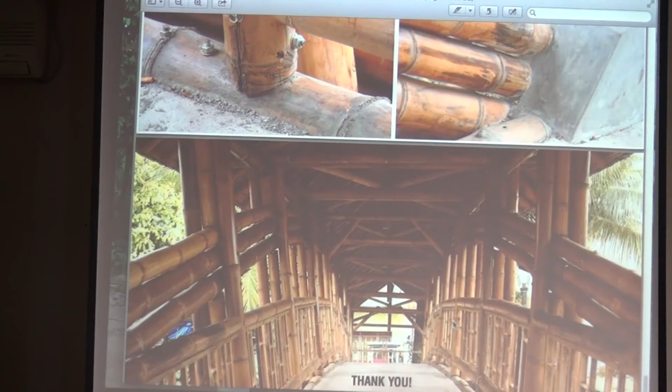There are different products. Simón Vélez has done a complete study of these cement additives, but in reality it is much more important to work with dry bamboo than using additives. Cement is shrinking a little bit when it's drying, but actually bamboo is never really dry when you put the cement in. So in practical life, we always use 1 cement and 2 sand, and we don't put additives. There have been tests done, but nobody does it. It's more important to watch the maturity of the bamboo, to watch the position of the buku.

And to do the injection when the bamboo is already ready. Like I do the injection when the bridge is already more or less 1 month finished, when the bridge is completely erected, everything straightened, everything nice, then I put cement in before the work really starts. So all the cementing is done at the end, after 1 month? More or less, because then the bamboo is already pretty dry.

But you see, in commercial terms, it's not very good, because if you have to finish a house quickly, and you do not have a provider who sends you dry bamboo already, you have a problem. In reality, you should develop bamboo providers that have, you could say, a timber yard or lumber yard, that already have good quality bamboo. So I don't want to talk bad about your experience, you did a very, very good job.

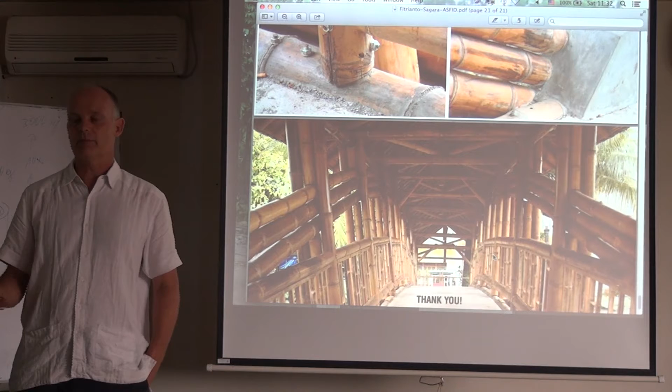The little details you have to learn is what I have learned. I have made so many errors, and I have made so many problems also with my bridges. So I'm speaking from experience, and I'm admitting that I have also had 50-meter bridges, and they had problems, yeah, because the cement injection was sometimes, I did not control the workers. So I told my master builder, you must put cement in here, everywhere, and they just did not do it.

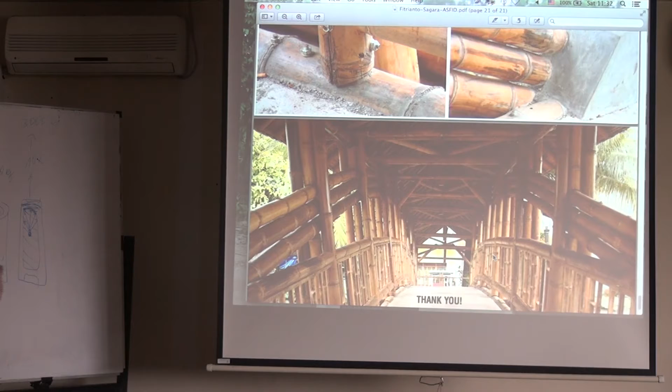And I had paid a site architect to be there and to write it 1 by 1. I said, okay, the plan, 1 by 1, you have to follow up. But then at lunchtime he just did this and then went for lunch. And then 2 months later the bridge had problems. Okay, so I thank you very much.

If you have more questions, but I think you're getting tired also, huh? I think we can keep the conversation while some of you guys having coffee and then do some walk around, so we can make it less formal. Yeah.

And I think what you addressed on the last part is also related to your question. Your name? Robin? There's some social part in this, like how we have same understanding on the project between the two camps and the owners of the structure, because they are who spend the resources for the project, and the technicians, including the architects, if we want this to be a long-term investment, then everyone should pay attention to the whole system in selecting bamboo, in putting control in the process, and to keep the standards high.